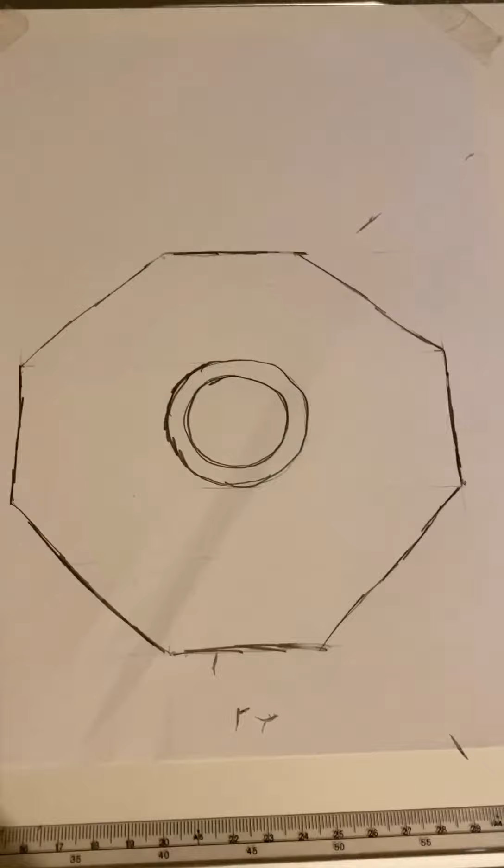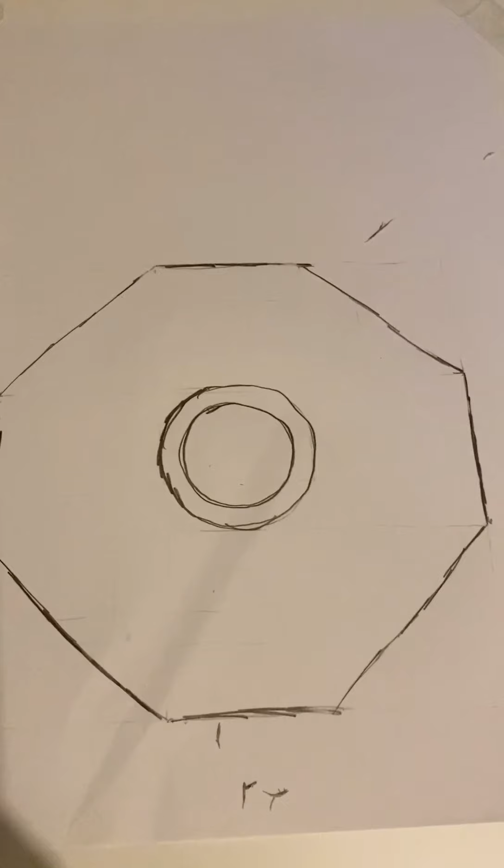Now I'm going to darken in any lines I haven't darkened in yet, and I'm going to rub out these lines here that I don't need anymore. Now I've rubbed out all my lines, I'm left with this, a rough octagon and a rough circle roughly in the middle. Lovely jubbly. Right, it's a wee bit hard to see from our photographs here, but we can see this is angling up, sloped. So we're going to attempt to draw that on our drawing.

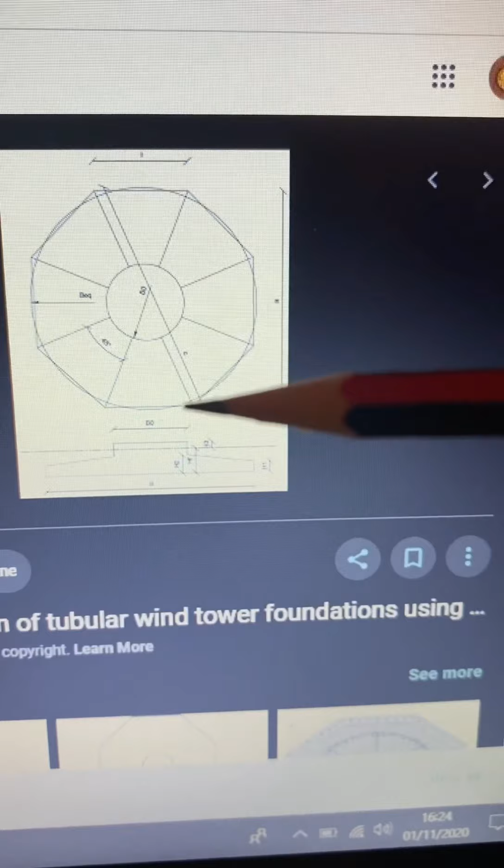Here's a similar diagram I've found on the internet, something similar to what we're going to be drawing. So we're going to be drawing these angles up here. That's what we're going to do next. To draw that roughly, I'm going to do a couple of little construction lines here and here, like north, south, east and west, etc., and that's going to help me position where these are going. Alright, I've done these light lines here.

What I'm going to do is I'm going to half them again, and that's going to help me position where these lines are going to meet. There we go. I just want to do these lightly because I'm going to rub them out later. Now I'm going to half these again. There we go. Now I'm going to mark with a dot every second one. This is just a wee idea I've come up with so we can roughly get these lines looking good. And there we go. We've got a rough sketch of a wind turbine base, a plan view.

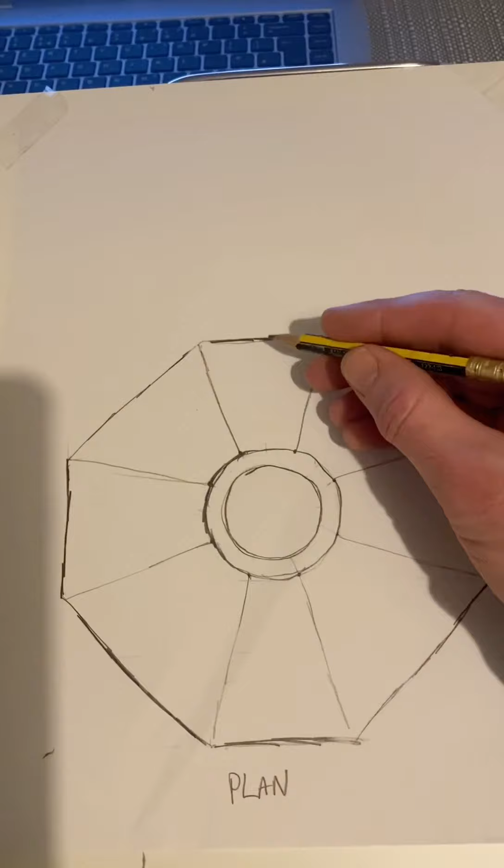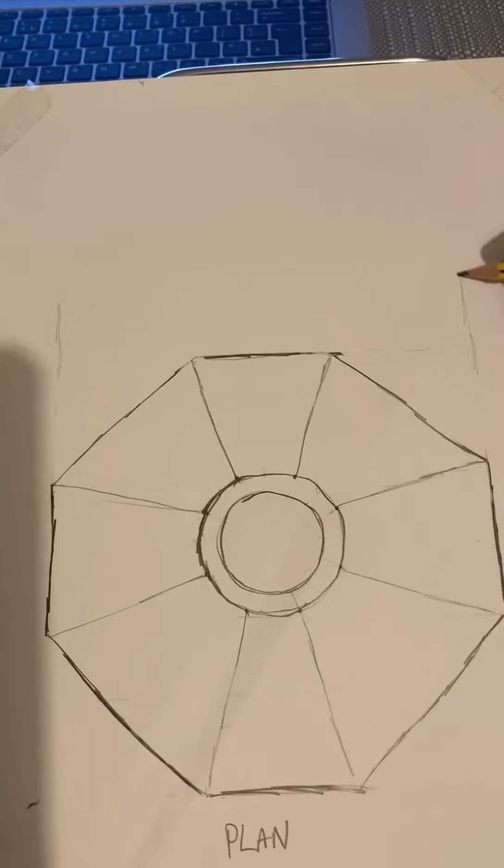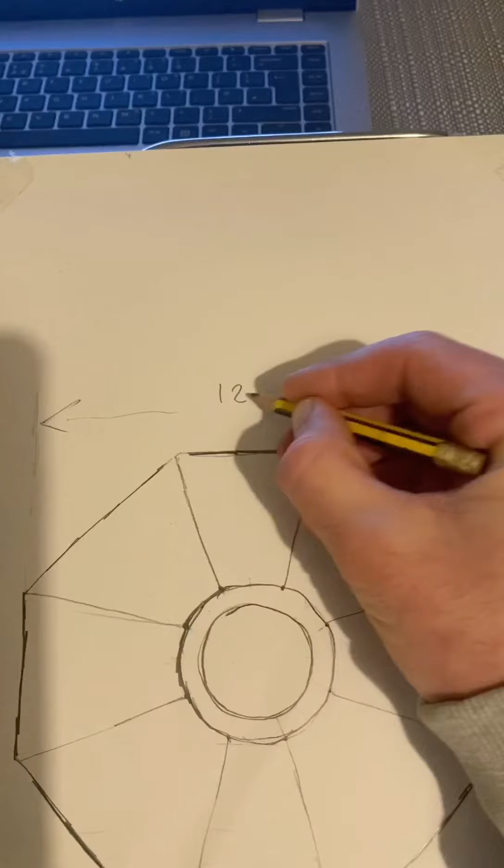So I'm going to annotate this and write plan view on it. I'm also going to annotate it for a rough size, a rough width of it here. From this point to this point, and it'll be the same from there to there. The distance should be the same. So I just need to show about here and here. Do an arrow, maybe a bit big, and I'm going to say this is 12 meters. There we go. That's the plan.

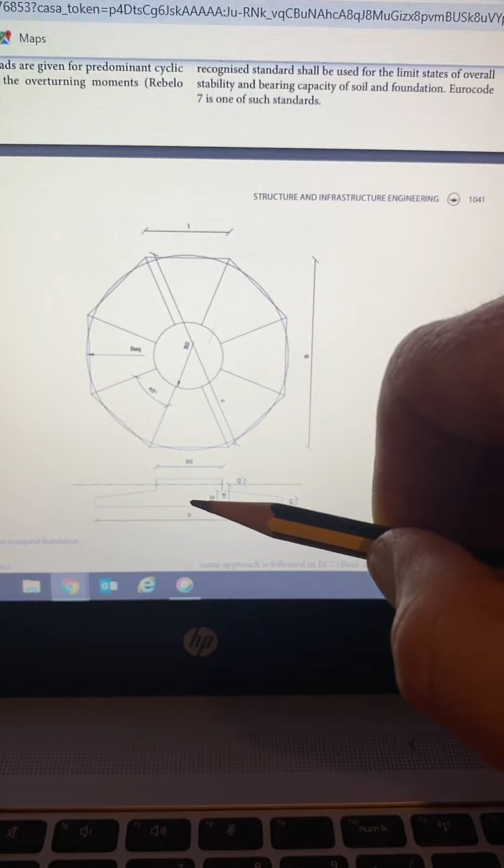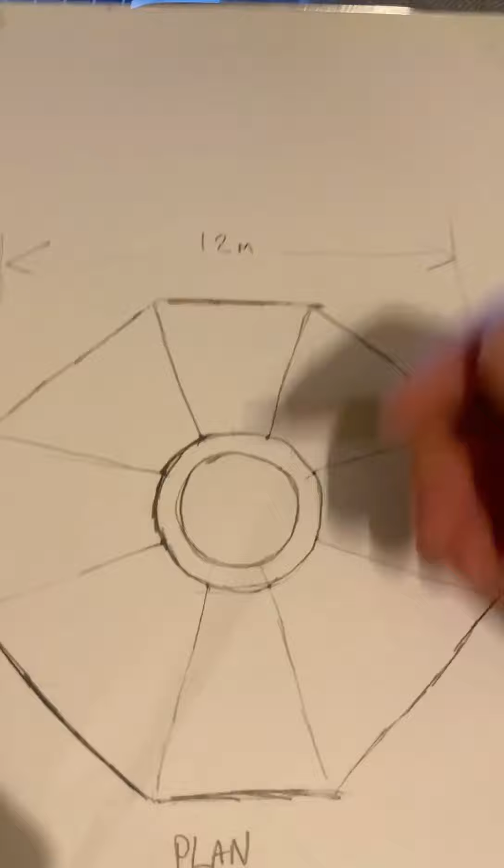That's the plan, man. Here's a diagram on the internet similar to what we're drawing, and we can see here it's got the plan and then the elevation. So that's looking at it from above, and that's looking at it side on. So we're going to attempt to draw something similar to this on the top of our page here. In this space here, I've got the opposite way around from this. They've got the plan at the top and the elevation at the bottom. I'm going the other way around. So I'm going to do that next.

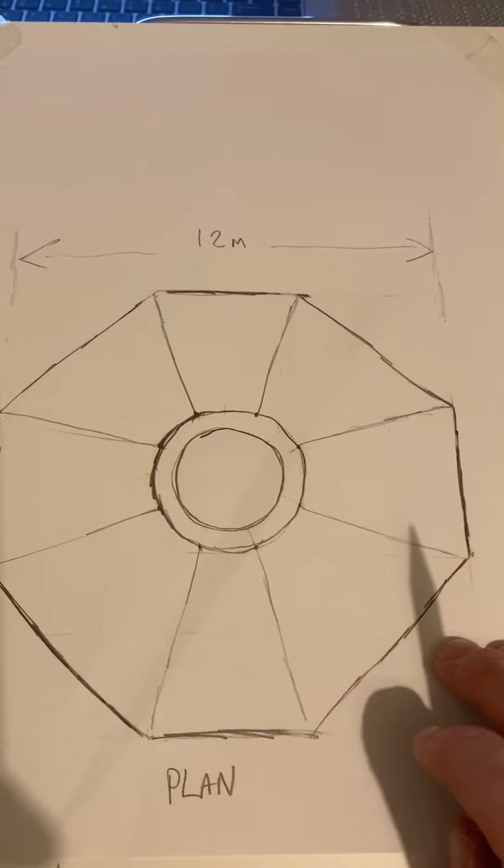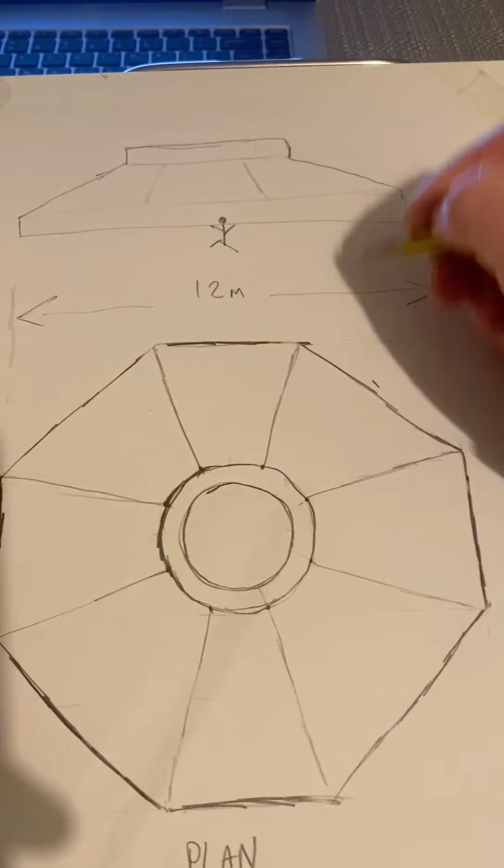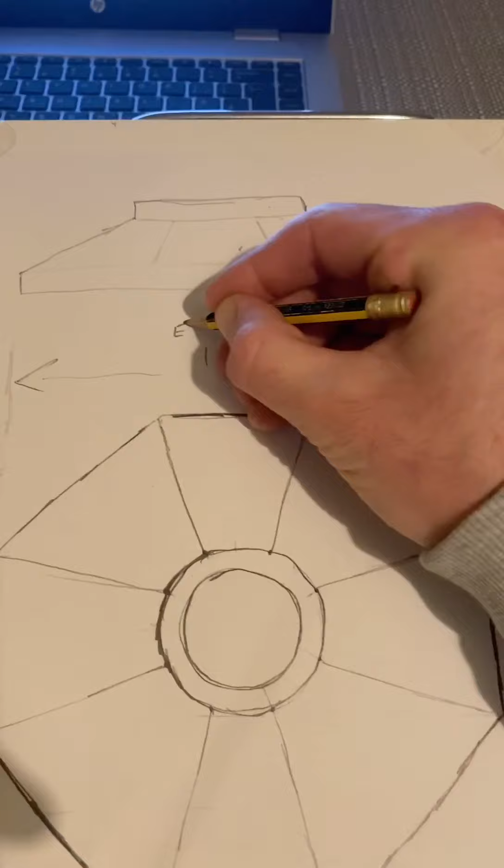There we go, I've just sketched that out. Here's that bit, here's a circle. So this would be like if you were standing looking at it, side on there. Like if you were standing right there. And that's what you'd see. So that's the elevation. So I'm going to write here, elevation. And I've kept these both roughly in line, so both measurements can do for the same drawing, because it is of the same thing, supposed to be the same size.

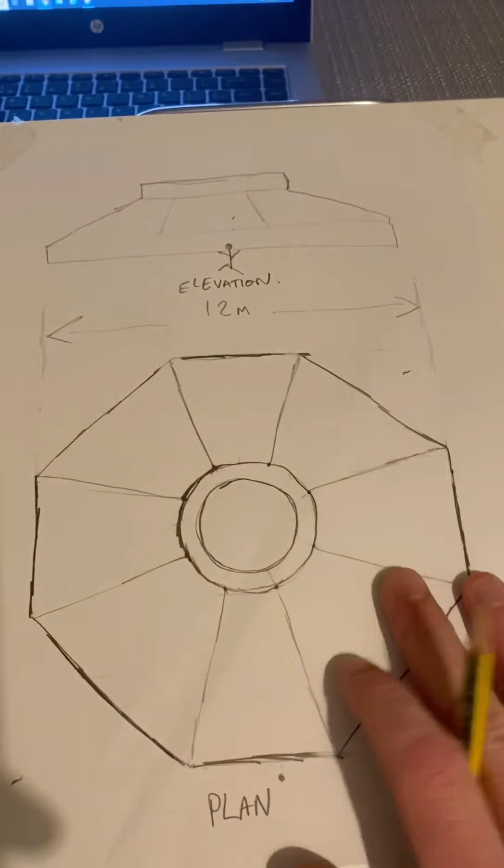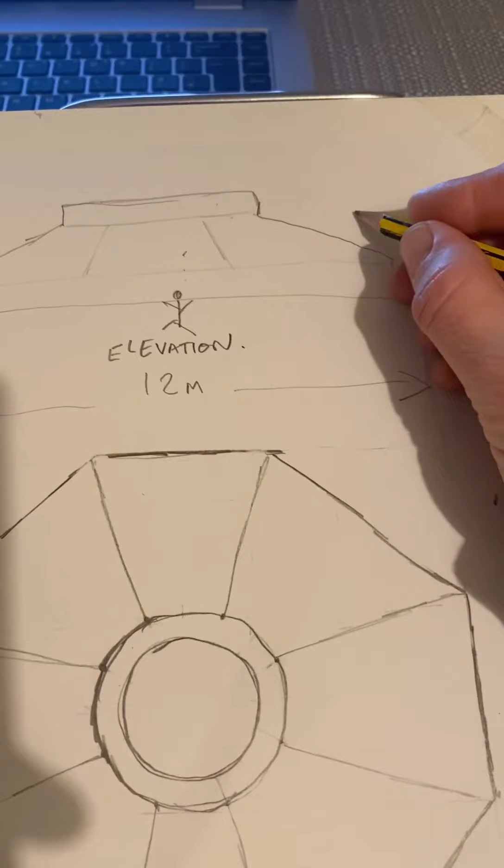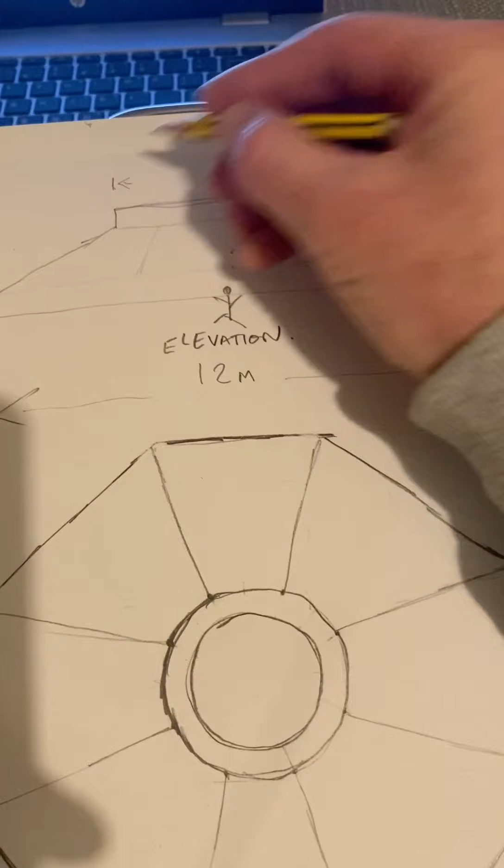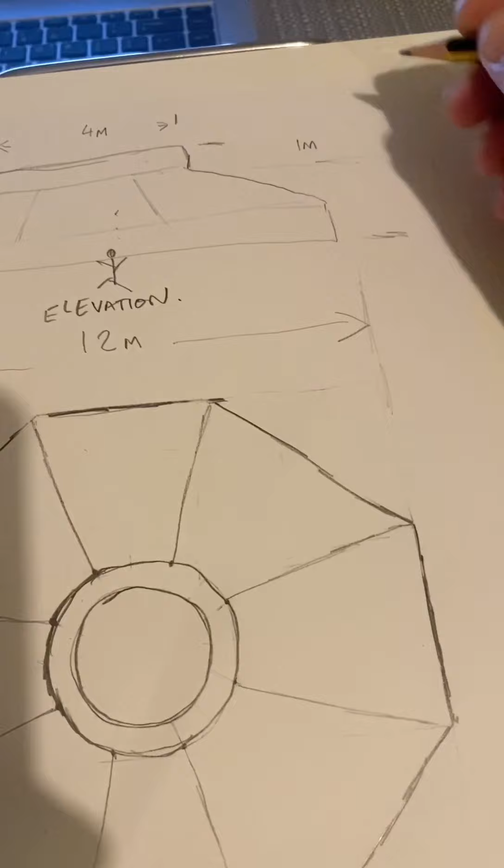This is just a rough sketch, but still we're going to annotate it and make it roughly the same size. So the sizes we're missing on this drawing would maybe be from this point here to the ground, and then from here to here. And we already know from here to here because we annotated it on this drawing. So the other size we want to know is what here to here is. And we're going to say that that is 4 meters. And we're going to make this 1 meter. And we're going to make this maybe 2 meters. Okay.